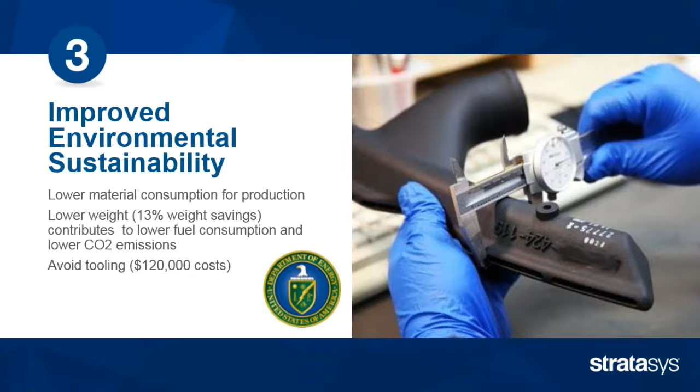During the printing process, they took advantage of 3D capabilities by reducing costs and the actual weight of the part, thanks to material and design capabilities. Not only was there a cost saving from not needing a tool, but the 13% weight savings reduced fuel consumption and ultimately lowered CO2 emissions - so 3D printing is also improving environmental sustainability for many companies.

The final story was also in the news some years ago - a UK Hawker Harrier jet had to make an emergency landing on an American aircraft carrier. The front landing gear failed to open, so they had to use a table to support the nose of the aircraft as it landed, which worked fairly successfully, but there was still some damage to the nose.

Thanks to 3D printing, the US Air Force was able to print FDM tools that enabled them to produce the metal parts, and also print a drill guide. They sent those parts out within a week and had the plane flying again in just over a week. They claimed that without this capability, the plane would have been grounded for at least a month with normal processes - another great story on how 3D printing is affecting the world today.

To summarize, 3D printing is actively changing the world around us in three key areas. The first is prototyping - this has been the bread and butter, particularly of the company Objet before its merger with Stratasys 3 years ago, and it's still very much the fundamental basis of the company's turnover in materials and hardware.

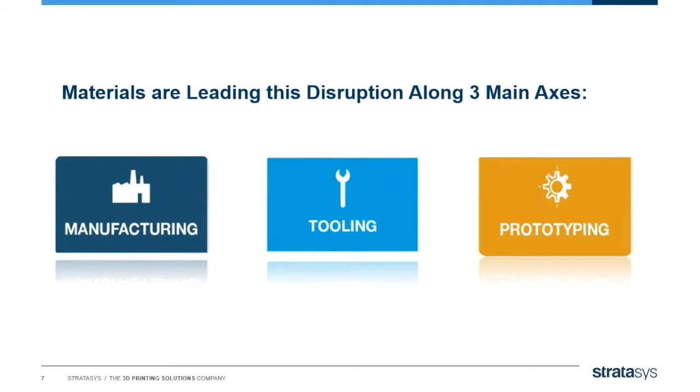So that's a quick overview and a glimpse of how we've been influencing the world around us today.

I'm now going to attempt to bring those of you who are not completely familiar with the company Stratasys up to date on the fundamentals of the company. We are a dual technology company. The company Objet, the Polyjet Israeli company, merged together with the original Stratasys company, which is based on the FDM thermoplastic technology.

Very simply put, these two technologies work in a very different way. Polyjet is jetting with a 2D printing type inkjet technology, a liquid polymer resin with a UV activator. As that material is jetted up to 7 million droplets per second, it is cured or hardened with a UV light source, and layer by layer we create our part.

On the other side, FDM thermoplastic is a more conventional process, probably more familiar to most of you, of taking a filament of real thermoplastic, driving it into a liquefier where it is liquefied and extruded, and then the process of creating the parts layer by layer is established.

There's one very fundamental difference, which will become obvious as I explain further, in how the two technologies are used by our customers, and that is the layer thickness. I think that's the one major difference between the two processes.

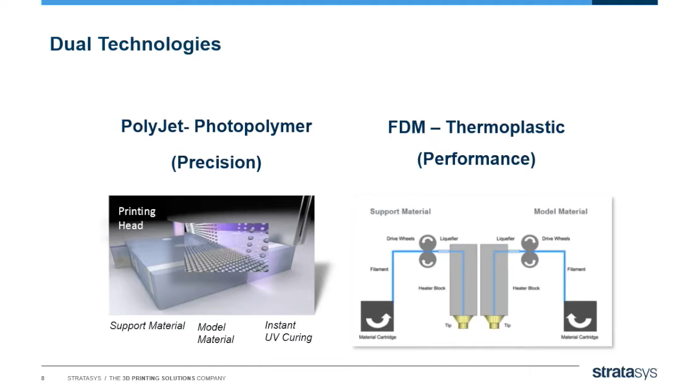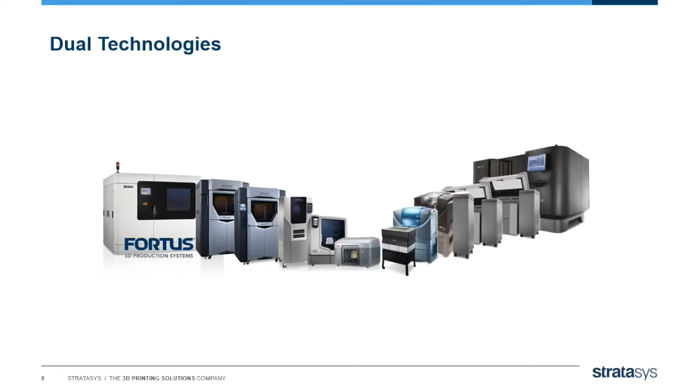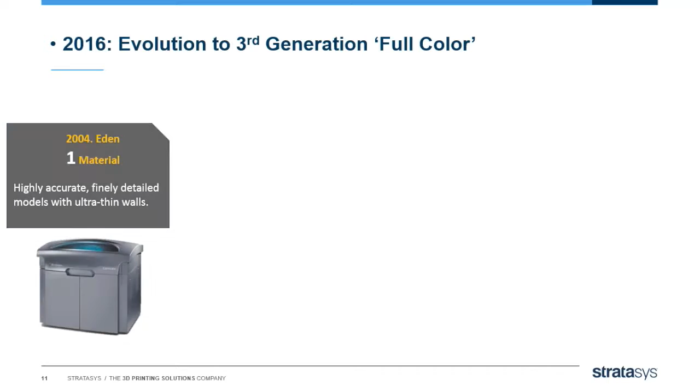Let's start by looking in more detail at the capabilities in the world of prototyping. The majority of the following slides will be related to the PolyJet technology, as I previously mentioned. It doesn't mean that FDM is not a candidate for prototyping. It is used in that area too, but I think it's dominant where Stratasys is concerned with the PolyJet technology itself.

Quick look back at the balance here, and I think it's important to show how much has happened in the last 10 to 12 years. With assurance, I can tell you that this continuing development in capabilities will only be advanced in the coming years. This is a taste of what's been happening, showing the commitment Stratasys has here, and how we will continue providing our customers in the coming years even better technology and materials to meet demands that will enhance the technologies used within each and every customer.

Back in 2004, we began by introducing, on the opposite side, an Eden platform, fundamentally jetting a liquid polymer resin. The limitation here is that we could only print with one material at a time. It may be a rigid material, it may be rubber-like or transparent, but there was only the capability to produce a single material. So we were comparable to many other technologies in the market.

In 2007, this is when we think we made the breakthrough. This is when we started to introduce to the industry the capability of simultaneously producing parts out of two base materials with fundamentally different properties. The simplest example is printing a part with rigid and rubber-like properties together - a rigid part with a flexible element, which in a conventional process would have required a complex and challenging secondary process. With the Connex system, you were able to produce those challenging parts in one pass.

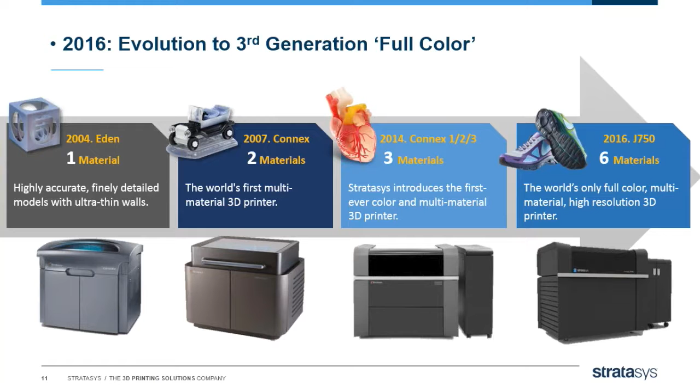Ultimately, just to put another point on the J750, the challenge to print a perfect prototype - something that comes out of the printer looking, feeling, and performing like the end part will do - is now within reach. From the most complex CT scanned images converted to a VRML file, as you see on the left, with brilliant color contrast and transparency abilities.

To great reproduction of shoes with rubber soles and flexibility in the build, as well as true color representation.

In the automotive industry, the J750 is wonderful for producing varnishes, reproducing surface structures and textures to the finest detail that would normally require challenging and difficult lamination processes on regular prototype printed parts. This is printed in one go, coming out of the printer with minimal cleaning required.

I'll go on to that topic in a moment - end parts that are simply going to look like the end product long before a final production run of that product is ever being considered.

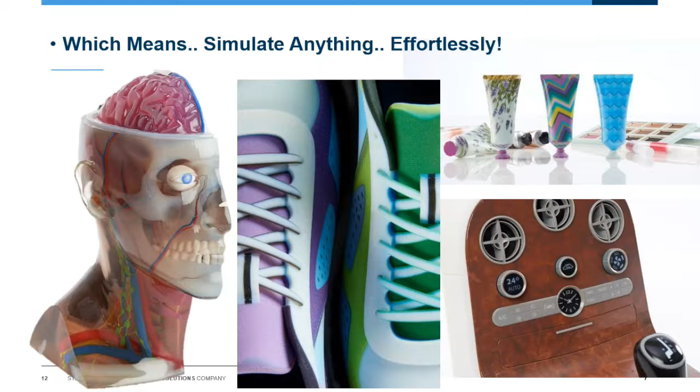Right, another quick reminder here on the PolyJet materials. Again, bear with me if you are familiar with this - I'm trying to bring everyone up to speed. There are a range of base materials available with the PolyJet system - actually around 25 base materials available today. They range from what we define as our rigid products.

These are a range of materials with limited material characteristics, meaning the performance is not particularly good. It's there to look good, but the functionality is not to be compared to real ABS materials - but it will make for an extremely effective prototype because of the fine surface and surface detail.

We have this material in a transparent version. We have it in simulated polypropylene materials - the DurusWhite, and most recently Rigur, which I'll talk about a bit later on. We have our Vero family.

This is the fundamental base material, Vero, which comes in 4 different versions, changed only by color: Vero White, Blue, Gray, and Black Plus. More recently, we've taken the Vero setup and added pigments so that we also have yellow, cyan, and magenta colors for the Connex3 and J750 range.

We've also got a range of simulated materials which we define as flexible - these are the rubber simulations we call Tango. The Tango materials differ by shore hardness: shore hard 27, 30, and 65 as the base material, the raw material coming out of the system, which comes with black, gray, or transparent appearance.

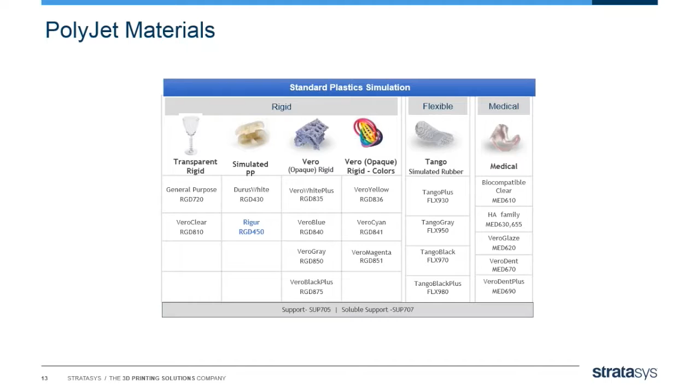At the high end of the PolyJet material portfolio, we have what we define now as our engineering plastic simulations. Again, we're talking about simulations here. We named the high temp material RGD 525.

I will be honest and say that the definition high temp is reflected compared to the previous Vero materials, which had a HDT of around 49 degrees. Here, our high temp material out of the printer will have a HDT of around 65 degrees Celsius. For those needing slightly higher thermal resistance, the material can be tempered in a programmable oven, pushing it up to about 75 degrees. That's a single material usable on many of our PolyJet systems.

The non-plus-ultra in the range of PolyJet at this moment is what we call our digital ABS, which has a thermal resistance of around 95 to 100 degrees Celsius depending on geometry, and an Izod impact of around 75 joules per meter. Those of you who saw the graph earlier will have seen this is the high-end material on the PolyJet range, but only available on the 2K and above systems. It is a two-component material, therefore we require a Connex or higher grade system to use this material.

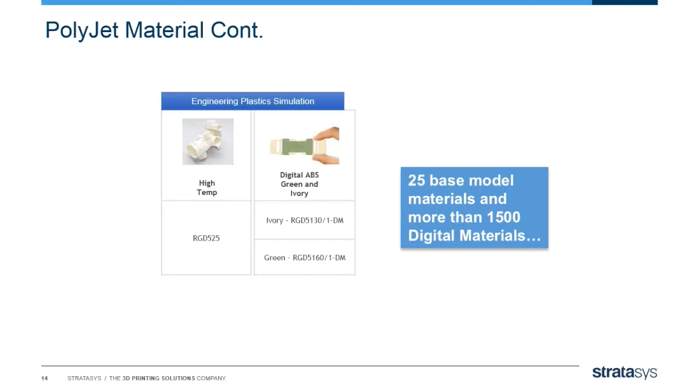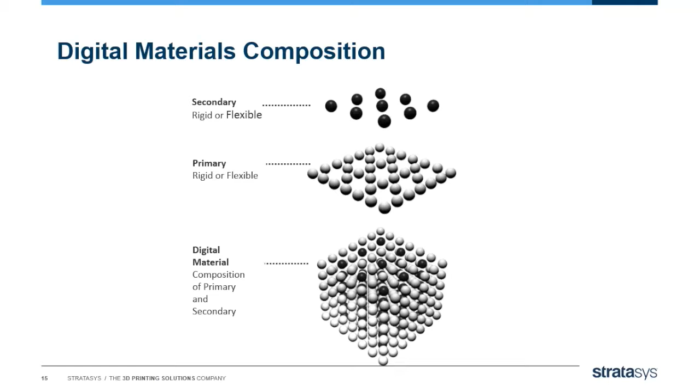Let me explain that statement in more detail. A digital material is basically a composition of two base materials: the primary, which could be rigid or flexible, printed simultaneously with the secondary material, which again could be rigid or flexible, depending on the required outcome of the end part. Those two materials are kept in separate canisters in liquid form, jetted simultaneously as on a 2D printer, and at the point of curing, on the layering and the bed of the printer, they cure, harden, and form a new third material, which we define as a digital material.

One of the areas where Stratasys pioneered 3D printing was in this conjunction of printing simultaneously rubber and rigid materials. Using a Vero or even a digital ABS material together with a rubber material allows you to produce a greater range of Shore A values. So I mentioned before that Tango Black Plus, for example, has in its pure form a Shore A value of 27, which may or may not be suitable.

But when you print it in a digital mode and add a component of rigid material, which you can do in various stages, you can have incremental Shore values going up to 95. So a part, whether it be a cable, a flex cable and a plug, earphones, a toy, a dress even, or a box or a surface structure, can have its rigid components with its soft touch, flexibility, and haptic end effects printed in one process. A very, very extremely flexible and unique process as it was back in 2007. There have been attempts to simulate this with other technologies in the last few years, but we still remain a clear leader in the development of this type of prototyping.

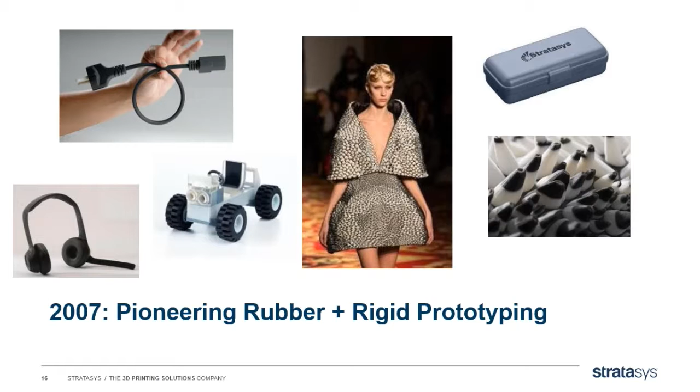Another development here, and this is something you'll see with Stratasys when we introduce a new material: where benefits are available on the PolyJet side to interact with existing materials, we enable as quickly as possible that new digital material. In this particular case, we've taken Tango Plus, a translucent rubber-like simulating material, and we print it simultaneously on the Connex 3 with two other rigid materials.

In this graphical case, taking the cyan and yellow materials, you can have a gamut of color ranging from transparent on the right to opaque color on the left, with a degree of Shore A values. On the right-hand side, where complete transparency is available, you have Shore A 27, and as you move from right to left with increasing amounts of rigid yellow and cyan, you get a greater Shore value, up to 35 or even 95. Darker is harder — the more opaque the component in the actual part, the more rigid the part becomes. So there's a limitation in terms of transparency, opaqueness, and flexibility, but still an interesting opportunity for some customers given by the Connex 3 and above technology.

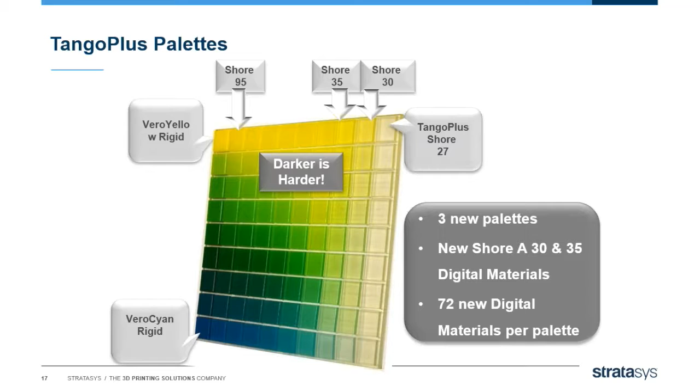Other material developments include improvements to our Tango family, such as the development of the rubber simulation with greater tear resistance, and also the introduction of what we call the Vero Clear material, which is a true transparent material that can be printed and polished. It can achieve results measurably similar to plexiglass.

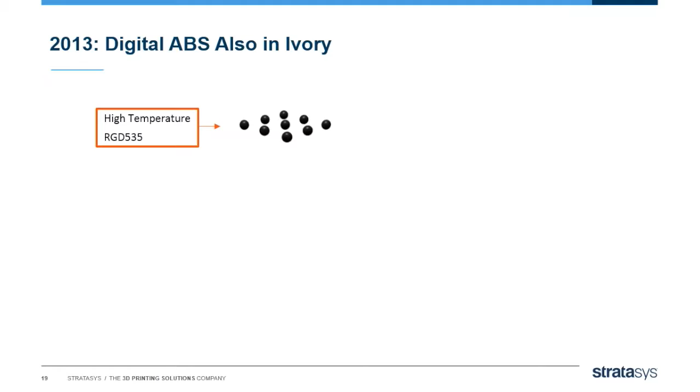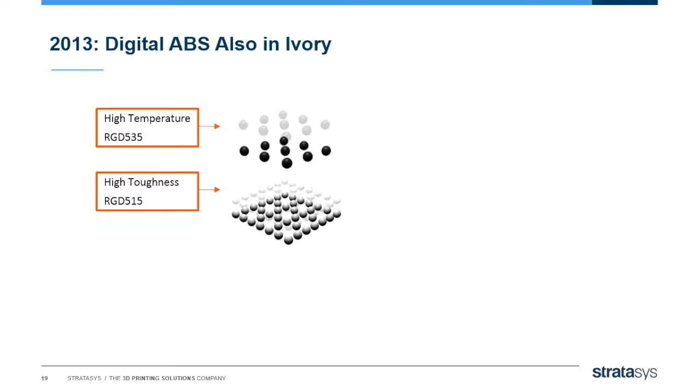Now let's concentrate a little more on the digital ABS material, as it is the key material in the world of PolyJet. Just a reminder, this is a 2K technology with two elements. The RGD535 provides the HDT, the high thermal resistance, and together with that we add the 515, the material with higher toughness. These two elements will not be effective on their own, each has a downside. The higher toughness material alone would have extremely low thermal resistance, while the higher temperature material alone would be extremely fragile. Together they are strong, alone they would be weak, so they are only available as a 2K component.

The original digital ABS came with a green color to distinguish it from other materials, and a few years later we introduced the ivory version. Take away the 535, add the 531 component, and you have an ivory version of the same digital ABS, with exactly the same data sheet, simply a different appearance, which was desirable for some industries and applications.

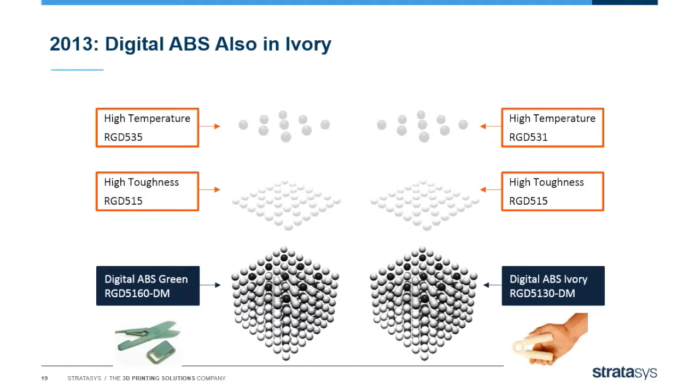One important step that happened during the last year or so was the introduction of our systems being able to use the VRML file format. Traditionally we've taken an STL file from the CAD system, and then it was the job of the user interface to the printer to define, by shell, which property applies, i.e. if you were using dual materials, rigid and soft, that was a manual process of identifying which part of the product was going to have a flexible element or a rigid element.

As we introduced color, the 3K color on the Connex 3, you could have a gamut of up to, I think, 45 different shades of color. This wasn't extended simply because we didn't believe in the task of manually trying to create something as complex as the image on the top right of the screen, which has fundamentally 192 shells, each a different color zone. In the previous process, that would have meant an operator having to click manually per shell and select from a drop-down menu in the user interface the required color.

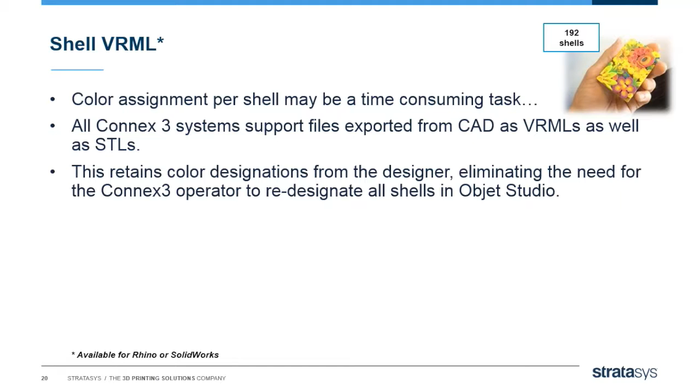Today we can talk about the import of a VRML file, which makes this job far easier and actually allows for the true color expansion in the business as we see it with the J750.

So just a quick overview: in the CAD world, the designer will design the parts and select the palette for colors, for features, even in the future. They will then assign the colors via either an Objet swatch, available for the Rhino and SolidWorks CAD systems, or through an RGB automated process. That VRML format will then be exported through the interface to the Objet Studio, where, once importing the VRML, the system will do a cross-check to make sure we have the correct materials in the system. So if color was required, the system would make you aware of the requirement for the CMY, white, and possibly black material cartridges. The only thing the operator then needs to do is position the part onto the build tray, and if there are multiple parts, there may be some need to manually optimize before printing begins.

It has never been easier to get fine detail and color from a 3D printer as it is now with this new process, made available in the Connex 3 systems available in the market today.

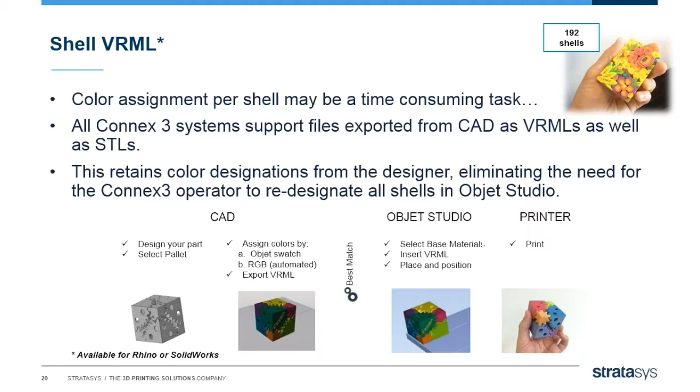Staying on the topic of PolyJet, a more recent introduction was a simulated polypropylene material. When we introduced this originally, it was initially called Endure. We had a legal challenge, unfortunately, so we had to change the name. The product is now called Rigur, RGD450, and this is the material we'd recommend when trying to produce prototypes that should simulate a polypropylene part.

It comes in a white color and has enhanced toughness — when we say enhanced, we're comparing to the base Vero material. The toughness is 30 to 35 joules per meter, elongation at break 20 to 35, and temperature resistance of around 54 degrees Celsius.

If you compare this to real plastics in the real world, it's nothing spectacular. However, it's an improvement by a considerable amount over the base family of Vero materials. There's a clear benefit for many customers producing basic prototypes that require some form of post-treatment where thermal resistance is an issue. With Vero, 49 degrees is just on the line of acceptance, whereas here the 54 degrees provides a bit more stability.

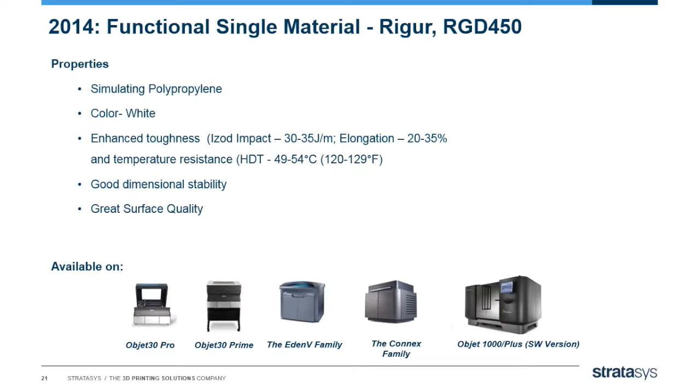Another little graph, a favorite of mine. You'll see along the horizontal axis it's showing toughness, and on the vertical, thermal resistance. Just to give you an idea of where Rigur sits — on the left-hand side of the screen, we have Vero with toughness in joules per meter around the 20 mark, and thermal resistance just below 50.

The alternative prior to Rigur being introduced was Durus — the polypropylene-simulated material we had on offer, and still have on offer at the moment. That was a material with far greater toughness than the Vero family, as you can see, around 40 to 50 joules per meter, so it was excellent for producing clips and living hinges and the like.

However, due to the inherent challenge of the polymers used, the thermal resistance was very low — just above 30 degrees Celsius — which meant this part was very prone to warping, even in an environment on a hot summer's day in the UK. It's feasible a part could warp due to extreme temperature, i.e. above 35 degrees Celsius.

So it was a challenge, and this is why I think the Rigur material is so welcomed — it provides a far greater thermal resistance than Durus, slightly better than Vero, while at the same time having toughness far better than Vero. Not quite as good as Durus, but good enough for many application needs our customers have in the field today.

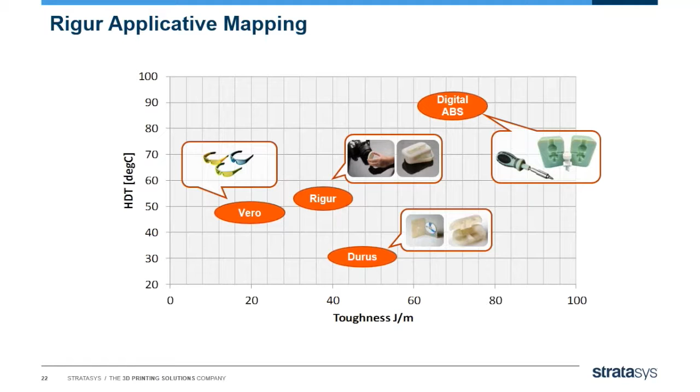Finally, the graph shows, to put it in perspective, how much better digital ABS is. The investment in the 2K technology provides a far superior material — thanks to the technology's ability to take two base materials, combine them, and have the benefits of both — with toughness of around 75 joules per meter and thermal resistance of 90 degrees after tempering with that ABS material.

So, one of my favorite topics, having been around with Objet for 7 years, this was always, as far as I was concerned, the holy grail - a challenge that the company's worked on for many years, and since 2015 was able to provide a solution initially for the Connex 3 range, but I can assure you we will be gradually releasing this soluble support material for a wider range of products in the coming years.

Okay, we did actually introduce for one specific product a soluble solution a year earlier, but that was a dedicated solution for a dedicated platform. This is a generic system that will be released on multiple platforms, and also has a very important capability of a hybrid solution. For those of you familiar with other soluble support solutions, I'm sure you know that they are dedicated - the part is printed in the system, taken out, and must then be placed into the jacuzzi, the bath, the process, which can take a number of hours to complete depending on the complexity of the parts.

With the soluble support 706, as I'm talking about now, we call this a hybrid solution. The hybrid solution means there is a fully hands-free process. You can take the part out of the printer and place it into a number of baths or jacuzzi where there will be a chemical, mechanical process of removing the support structure. Depending on the complexity of the part and the amount of support in place, anywhere between 2 to 24 hours for the majority of parts can be cleaned, with a simple rinse off at the end of that process. But there's also a semi-manual process in which you can remove bulky areas of support structure before placing into the hands-free process, reducing the actual cleaning time depending on the geometry.

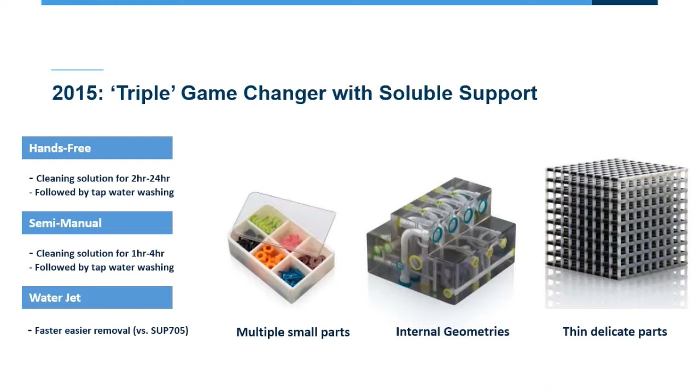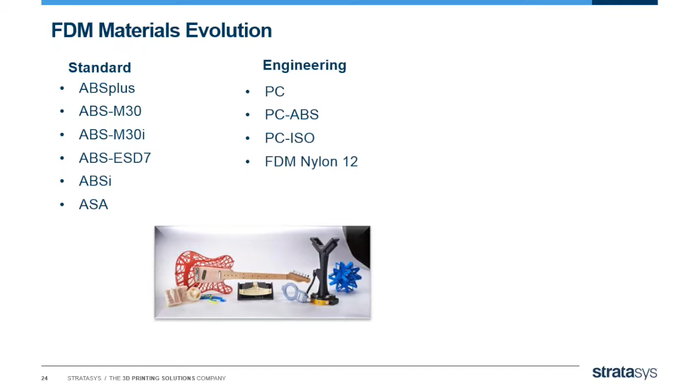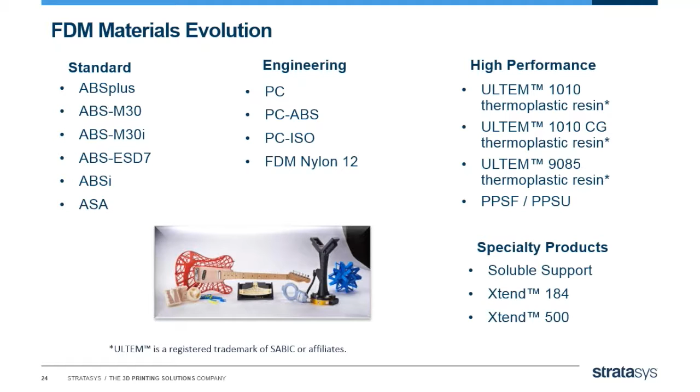Okay, so that concludes the overview on PolyJet. I'm now going to move on to FDM materials. Quick overview - here we also have a range of materials. The standard, where we have the ABS materials. What we define as engineering plastics, where we have the polycarbs and the most recently introduced nylon 12. And the high performance materials, where we have the Ultem and PPSF materials, which I'll talk about in a few moments. There's also specialty products, which I'll touch on briefly - soluble cores, soluble support, and also volume packaging, which was also introduced to the FDM world recently.

Quickly looking at the first new material introduced in recent years, and that was FDM ASA. Basically ASA is defined as taking ABS to the next level. The first and most beneficial benefit of ASA compared to ABS is it is far more UV stable. We have some data on that in a moment, but this is the material where the part is going to be subject to continuous UV light, where degradation of the part or the color is something that's not desirable. The ASA is going to provide excellent results compared to ABS materials.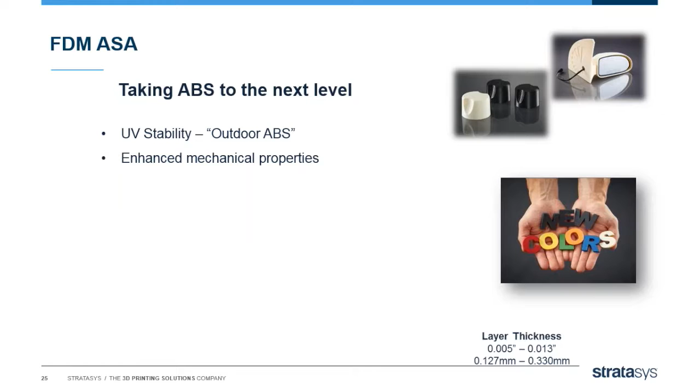It will also have enhanced mechanical properties, so you're not going to have to accept poor datasheet properties just to get the UV stability. The ASA is in all accounts actually better than the regular ABS material as well, so a plus there. It comes available in up to 8 different colors, so you don't just have black and white. You can also, if you need end-color parts, again for definition or even marketing purposes, print in a range of standardly available color parts.

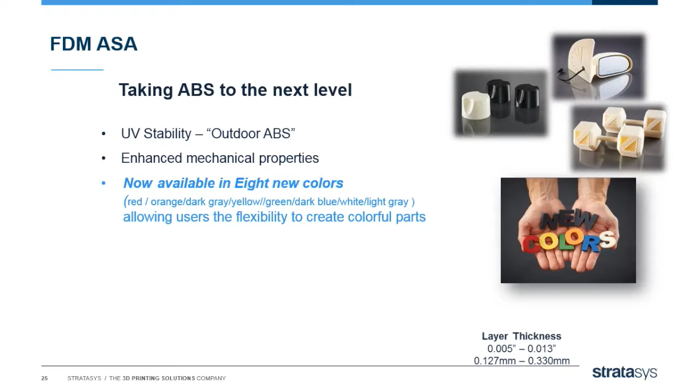As I said before, it is actually stronger and tougher than the ABS M30 material. So you have these additional abilities plus a stronger and tougher material compared to ABS M30. Good news is it's available on basically all of the Fortus range, 360, 380, 400, 450, 900, and also has layer thicknesses from 127 to 330 microns.

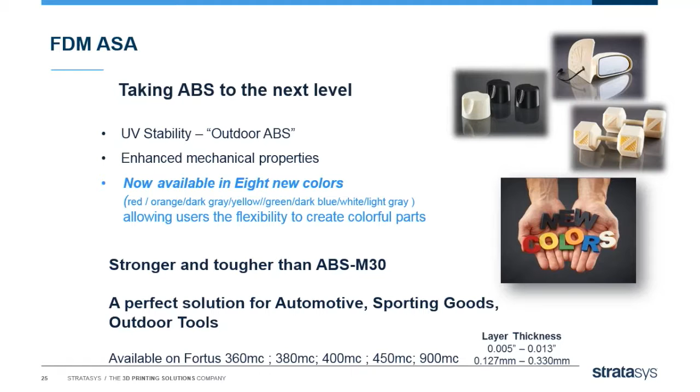One nice feature of the strength of this material compared to ABS is its ability to use a weaker, less used material for what we call the sparse mode print. So if you had a volume part, a solid part—we're using a dumbbell here for effect—you can see on the left the sparse build mode, which lowers the weight of the print job. It's also reducing the amount of material and print time. You can see here the finer honeycomb structure.

This dumbbell, printed as effectively as it could be in ABS mode, would weigh 1.11 kilograms. On the right-hand side, you see the same part printed in sparse mode, but with a finer sparse mode. You can see clearly the honeycombing is far more sparse, meaning there's less material used. That means the print time is shorter, and also the overall weight of the part is considerably lighter—nearly half the weight, a saving of 63% here. So one of the benefits for a part used in production, tooling, jigs and fixtures is a very interesting aspect of ASA compared to ABS material.

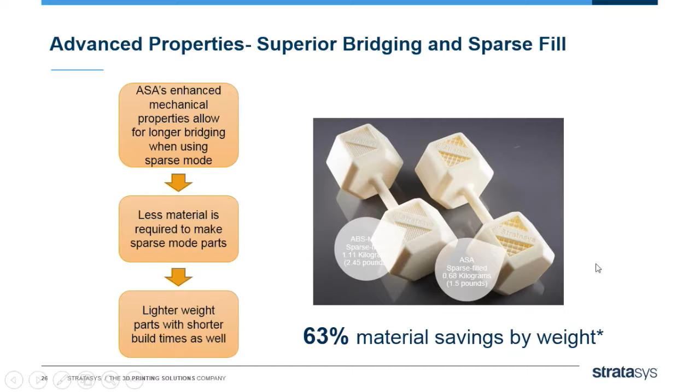I mentioned there's some data to point out in the comments here. Color resistance fading—based on the delta E factor, the table on the left shows a fading of delta E for ABS M30 over a period of 1,000 hours of 26. With ASA over 2,500 hours of simulated sunlight, the fade is only 0.8. We're stating here that a differentiation of less than 1 delta E is not even noticeable, so you can see clearly a great improvement.

There is also some drop-off in material properties over time. On the graph on the right, in black, ABS M30 drops off quite considerably in performance, shown here as elongation at break—coming out of the system at 9% elongation at break. After only 500 hours, that elongation at break drops to 1%, and it remains stable to 1,000 hours. In green, representing ASA, it comes out of the system at around 10% elongation at break, and that's maintained—after 500 hours it only drops by 1%, and even after 1,000 hours we still have 7% elongation at break. So two areas where the durability of ASA compared to ABS shows performance enhancement.

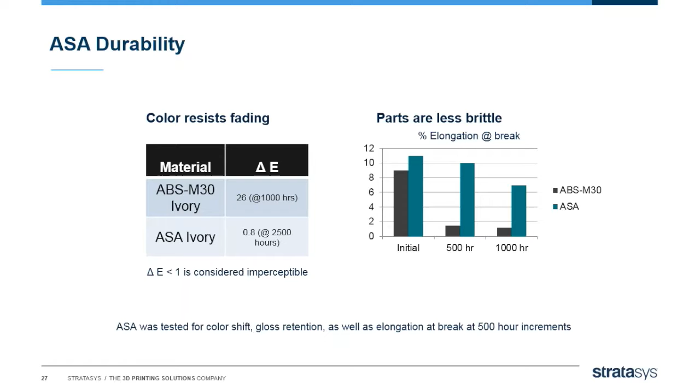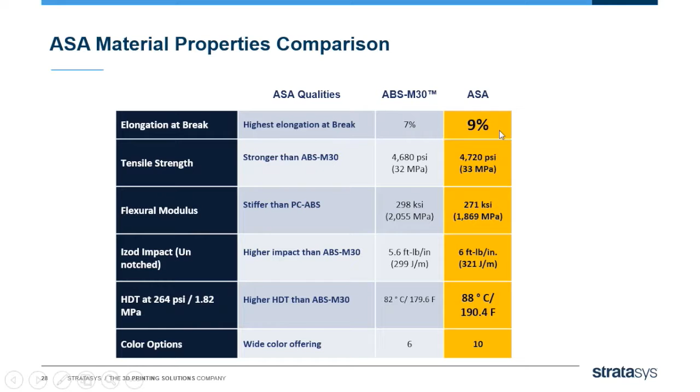A quick table with more data. Fundamentally, what we're telling you here is that in every aspect on the data sheet, ASA is an improvement. There are therefore no real disadvantages to moving to the ASA material. Pricing-wise it's similar, so there's a great opportunity here. For those of you using ABS material with FDM technology today, we'd strongly advise you to consider ASA. You can contact us any time to find out more about getting a sample or testing it yourself and benefit from this great development.

Another development in the world of FDM was the introduction of nylon 12 back in 2013. This was basically a breakthrough in terms of the flexibility or elongation at break of an FDM part. Up until this point, we were only talking about flexibility in the realm of a few percent. Now, with this 30% elongation at break factor, we can talk about FDM printed parts with a real degree of flexibility. Production of clip functions and living hinges is now something that can be considered.

In addition, what's very important about this material is that its Z strength is greatly enhanced compared to other materials. One of the challenges in the FDM world is getting the data point in the Z-axis as close as possible to the data point in X and Y. FDM parts are never isotropic—the data is never the same in the Z as in the X and Y directions. Typically, other FDM materials from Stratasys will be around 70-75%. But with this purpose-developed material, built from the ground up, our engineers have been able to establish a Z strength comparable to X and Y of 90%.

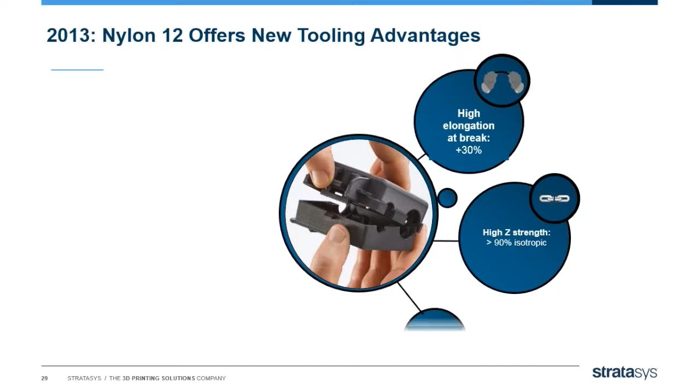And that's something where we are investing a lot of time and money in future to make sure that this theoretical weakness in FDM technology is being reduced as much as possible. It's available currently only in black. It also has, very importantly, a soluble support coming along. Many of the materials are compatible with a breakable solution where the support structure is manually removed, but we also have a number of FDM materials with soluble support. I'm happy to say nylon 12 also comes with the SR110 soluble support structure. It's also got the highest impact resistance of all the FDM systems, at 200 joules per meter, and it's supported with all 3 slice thicknesses, so there's no loss of layer thickness with this material.

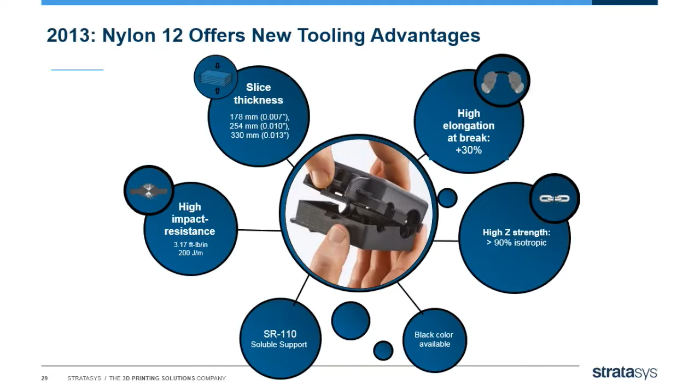Obviously there are benefits here, and clearly the automotive industry was quick to pick up on this. The development and production of tools, jigs, and fixtures for this segment has shown clear advantages through the performance of the nylon 12 material, producing lighter and stronger parts. The ability to 3D print a part lets you optimize that part's design and structure. The speed to produce these tools thanks to 3D printing is a great advantage for production line assembly, and the performance and capabilities of nylon 12 support the needs of many of those requirements.

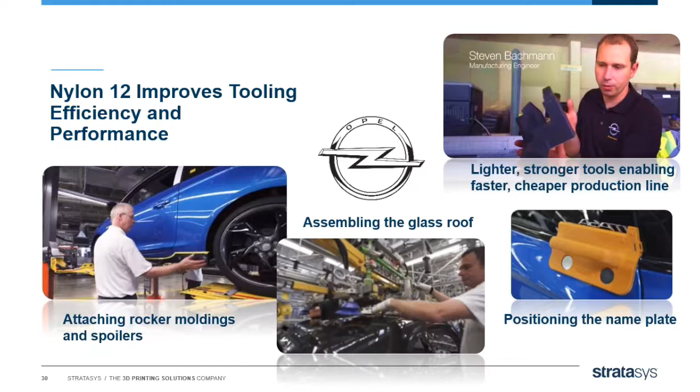Another very interesting issue here, not directly related to material development but very important when we look towards manufacturing, is the speed of the printing process. In 2016 we're introducing a high-speed FDM solution, which we believe will be very interesting where parts aren't that demanding in surface structure. Ultimately, this is an acceleration kit. We're introducing the T40 tips, which enable the system to print with thicker layer thicknesses, putting more material down per layer. This increases the speed at which it takes to print a part. The downside is the thicker layer thickness, so they wouldn't be suitable for every application, but where surface structure isn't key, while reliability, accuracy, and strength of material are key, we believe this is an excellent way to further increase the optimum use of the systems available today.

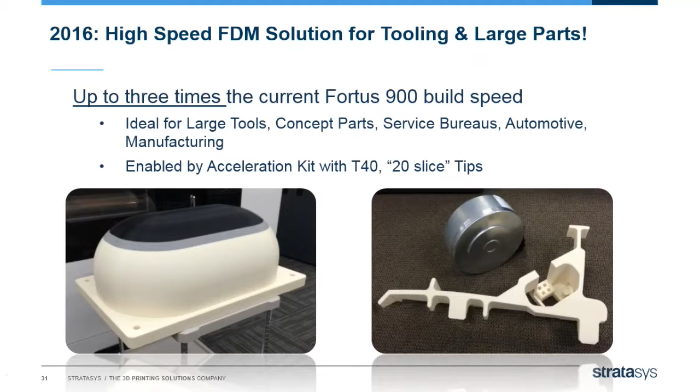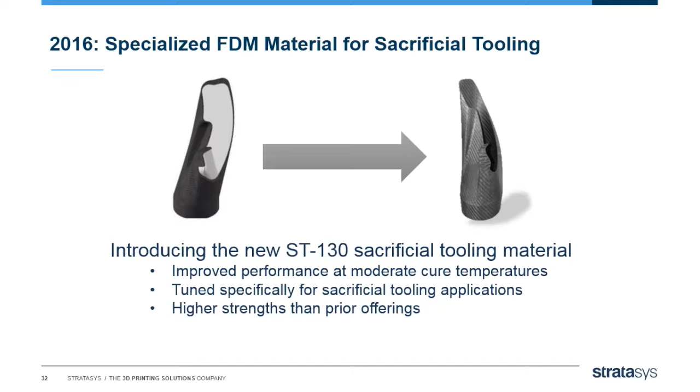One other development we've acted on, as I mentioned briefly, is that we've developed soluble support structures for our base materials in the FDM world for many years, and some customers were using one of those soluble support structures as a sacrificial tool, or a soluble core as it was called then. We've now taken that principle and application and developed a specific soluble material with enhanced characteristics to meet this application need better than the standard soluble solution. So the ST-130 is now defined as an application material for the sacrificial tool material. It has improved performance, particularly where moderate curing temperatures are required, depending on the end process. It's tuned specifically for this application - this isn't a tweaking or misuse of a soluble solution material, but a dedicated material made for the sacrificial tooling application.

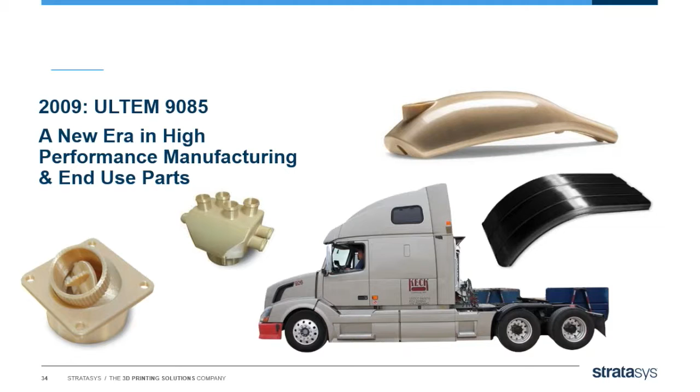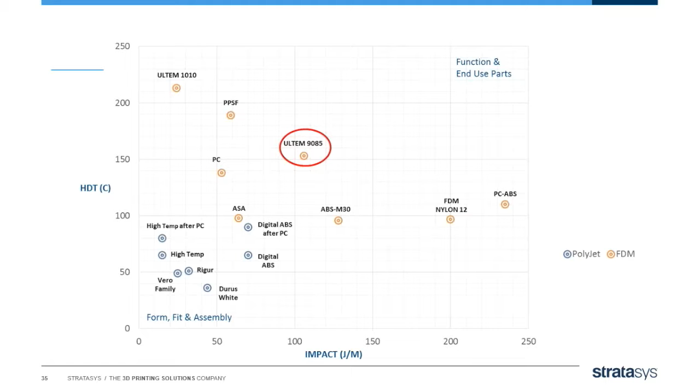So the final section in this part of the webinar is development for the manufacturing world. I mentioned in the previous slide, the Ultem is our ultimate high-end performance material in the world of FDM. Customers have already been benefiting, producing parts that stand up to the toughest tests, and in some cases even going into end part production where short series part requirements are needed, even in the aerospace industry. Just a quick reminder - similar graph, different dots here, no diamonds and squares but circles, but you see the same logistics, where you can clearly see the Ultem 9085, both in impact and thermal resistance, is a star, only bettered by the PPSF and the Ultem 1010 materials, but clearly a high performance material with great opportunities in the industry today.

Recalling back to one of those first stories, that drone that was being manufactured in a unique way compared to conventional processes - it was the Ultem 9085 material that was providing the material capabilities, the low weight structural strength that was required for such a device.

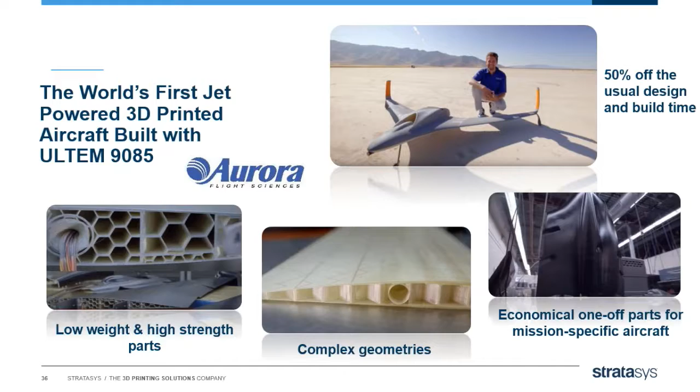So this is where the Ultem material is providing some of its most unique capabilities. Moving quickly on, because the 9085 has been around for a while, the introduction of the 1010 Ultem took us to the next level, and it's proving a very successful introduction, available on the Fortus 900, 450, and 400 platforms at this moment in time.

It is an all-round top performer. It has the highest temperature resistance of all the FDM materials, around 213 degrees Celsius. The best fire-resistant material with the lowest coefficient of thermal expansion. It has the best chemical resistance. That's a huge statement, but fundamentally there'll be individual tests required, possibly from customer to customer. But if chemical resistant parts are something you're looking for, the likelihood that the Ultem 1010 is going to meet those needs compared to any other FDM material is strong.

This material comes with a number of certifications. It has biocompatibility certifications. It can be used to produce parts in food processing where food contact is a challenge, and it has FST certification as well. So there are a number of standard certifications that come with this material with the packaging as standard. It has ease of use, and we're saying ease of use here.

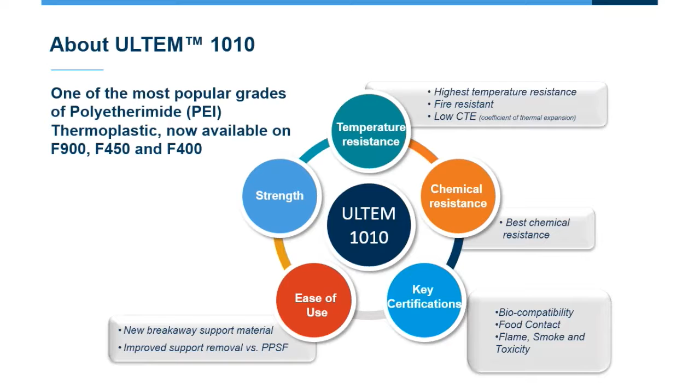Unfortunately, there is no soluble support for the Ultem 1010 or the 9085. We still have challenges here due to the build temperature in the device. To have a support structure that is also soluble has still eluded us. But what we say here with the ease of use is compared directly to the other high performance material, PPSF, which is similar on the data sheet. It's not quite as good as the Ultem 1010, but the support structure for this material is extremely difficult to break away. The comparable Ultem 1010 support material is far easier. So we would expect any customer who has the need of PPSF material would immediately see the benefits of moving to the Ultem 1010, both from a performance and an ease of use standpoint in terms of removing that support structure.

And it is the highest in terms of tensile strength FDM material in the market today.

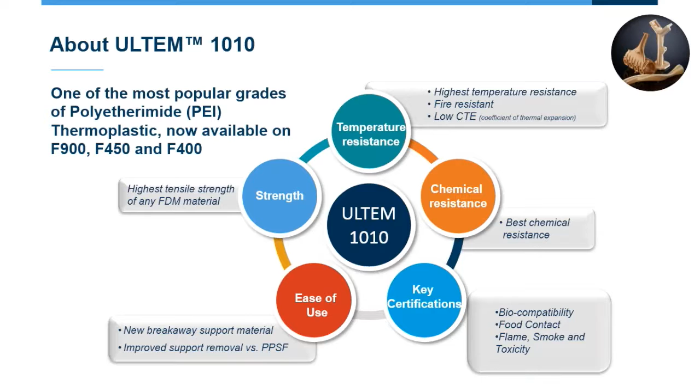This is a little sample here of how it's being used. Basically, a few nozzles here in aerospace industries. And I think this is the message we're trying to get across: this material with its certifications is really at the high end of the market scale and already has aerospace certification. There are actual parts flying above our heads today in planes that have been printed on Fortus systems using the Ultem 9085 material, and the Ultem 1010 has similar or better characteristics. So clearly, if it's able to meet requirements of such an industry, I'm sure there are many other industries that will benefit from this development.

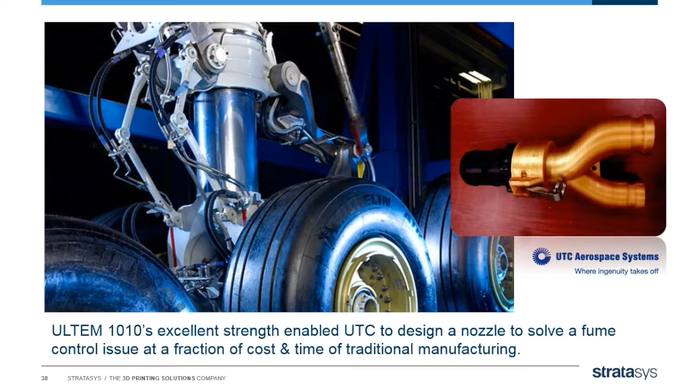Data sheet points here. I think there's an overview. Basically, what we're saying is the Ultem 1010 outperforms the Ultem 9085 or PPSF in almost every aspect, in many areas greatly. There's possibly one area where, if you are an Ultem 9085 user, i.e. you have the Fortus and this is the material of your choice and you're getting your ears pricked by my information on the 1010, please be aware that there is one area of deficit, and that is the izod impact, the notched, the rigidness, the brittleness of the system material here. This is a deficit here. So this is possibly the one area where you may consider to stay with the Ultem 9085 compared to the 1010. In all other areas, there is an enhancement or a benefit by moving from the 9085 to the 1010 as a base material.

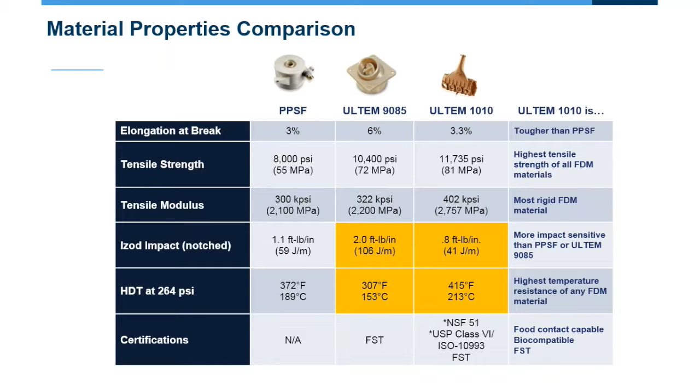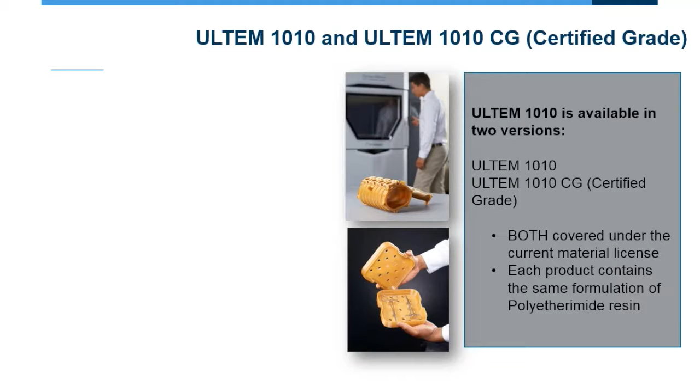Just mentioned before, aerospace implementation is possible. There are two versions of the 1010. Should you start to become interested in this material, if you have the system's availability, please note that there is a CG version, a certified grade. Basically, it's the same material technically, but we obviously have the capability of providing all the necessary information on the raw materials and tracking the production that's required in certain industries. So the 1010 CG certified grade material would be the material of choice if you're an approved aerospace, Airbus for example, supplier - that would be the material that you would require in order to meet the stringent requirements for such an industry's application need.

So finally, to close this session, I'm talking about something related to materials, but not directly the materials themselves. We are obviously always looking at ways to enhance the performance of the overall system.

Traditionally, the standard canisters come in a 92 cubic inch system, and we introduced some time ago the 184. This has double the capacity, enabling systems to be unattended, building over the weekend for over 90 hours. There's no need with these larger volume canisters to have someone pop in over the weekend and replace a canister that may be extinguished. This is a standard option with no special upgrades or material options needed.

There's even a volume discount passed on with this larger volume canister. Because of the volume, we're seeing a direct cost comparison to regular pricing materials of about 5% savings. At this moment, it's available for the ABS M30 in ivory and black with its soluble support, and also the polycarbonate and its support structure. If there's demand for other materials, we can introduce them for this volume canister in the future.

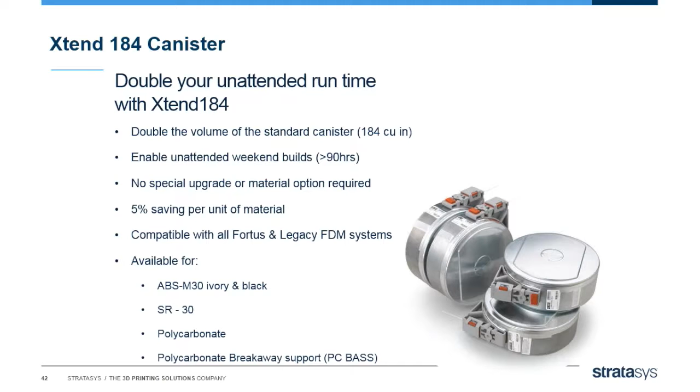Finally, taking that volume concept and unattended operation even further, there's the Xtend 500 Fortus Plus canisters. Here we have 5 times the volume of the regular canister, so up to 200 hours of unattended run per box, with similar cost savings of about 5% compared to the original canister volume. Here there may be possible upgrades needed, as the canister is so large it actually stands outside the system, requiring some modifications on existing platforms. It will support the ABS M30 ivory and black plus support, the polycarbonate support structure, as well as the Ultem 9085 natural and support structure for the future.

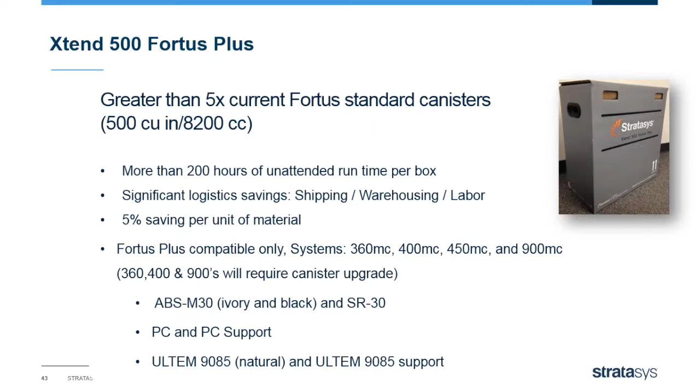That completes my part of the webinar. I thank you all very much for your attendance and your attention, and I believe we're now going to open up the session to any questions that you may have been submitting during the period.